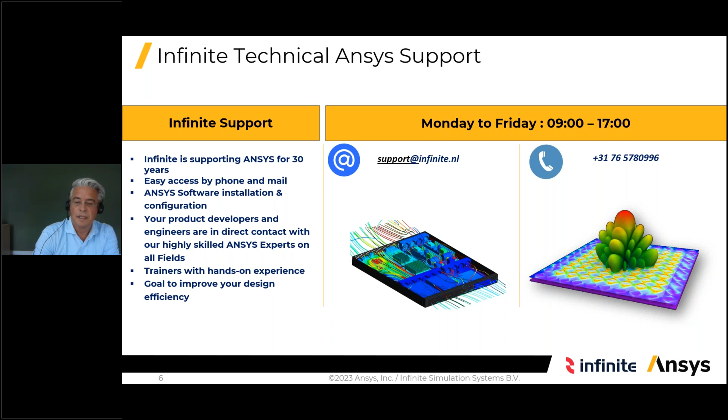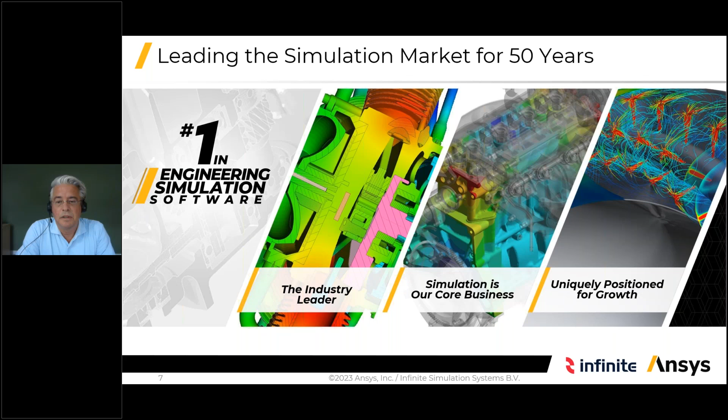ANSYS itself has been on the market for 50 years. They are the industry leader, so it's the most used simulation software out there. And the only thing ANSYS does is simulation. So they are focused on improving the software year after year, and that also makes it possible to have a great, unique positioning for growth and new technologies in the future.

Next, if you look at simulation in general, most of the time it starts with an idea and then an early design, and that's also where most of the costs are located. So using ANSYS upfront can help you to reduce the costs, by reducing the development time during your design and analysis, but also, of course, to avoid warranty costs. So that's the design and analysis part.

ANSYS is also getting more active in the manufacturing part, for instance reducing weight by doing topology optimizations, but also using ANSYS to simulate the 3D printing process, especially for metal. And finally, if your product or process is in place, you can also do simulations. The main reason is to reduce your maintenance costs, and that's what we call a digital twin nowadays.

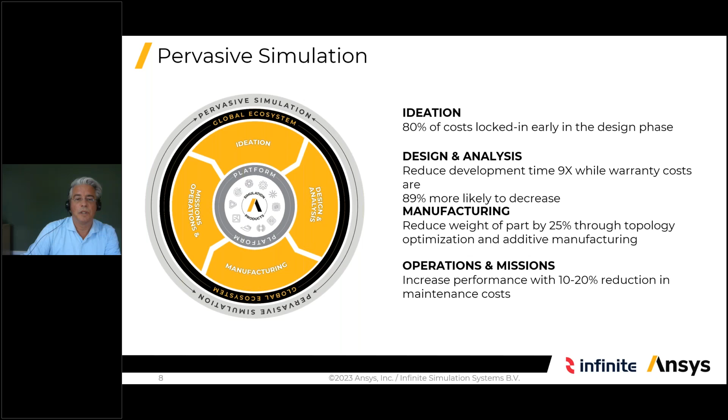Over here you see an example of such a digital twin. This is an example of ABB. They are developing, in this case, an electromotor, and the demands nowadays are getting more strict. You have a smaller volume, and you still have to have the same cooling.

So you want to optimize this, and in this case, the electromotor is calculated by Fluent to predict the thermal performance. Of this total model, a reduced order model is built, and that's done by doing a couple of hard designs, and then out of these hard designs creating a reduced order model so that you can have accurate answers in a matter of milliseconds even.

And so that's done by this technique. And in this example, you see an electromotor, and you want to investigate the thermal behavior when such a train starts, when it accelerates, when it's in the cruise phase, and when it stops. And then you can decide from the temperature distribution to predict the motor failure in real time. So the motor is sensored, and you compare it with your simulation results, and you can decide in a very short manner what to do when things have to be maintained or the train has to be stopped.

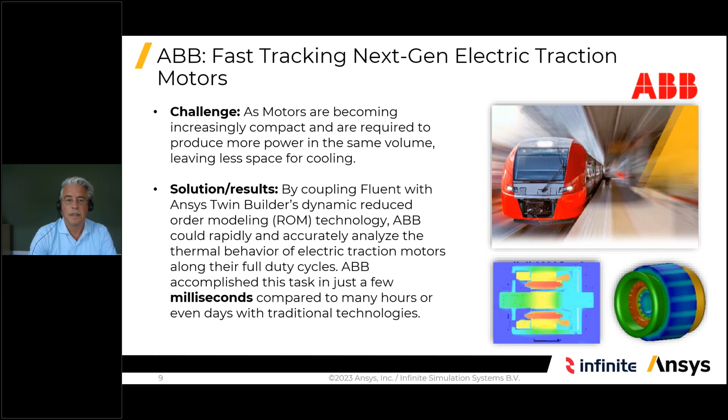If you look nowadays at the ANSYS portfolio, ANSYS started a bit like a structural mechanical software, but nowadays you have special solutions for material investigations, for safety analysis, for doing structural mechanics. Also, LS-DYNA is part of the ANSYS family, for explicit calculations, fluids with Fluent, the most used code. But today we are going to focus more on the electronics, and especially on the high frequency electronics.

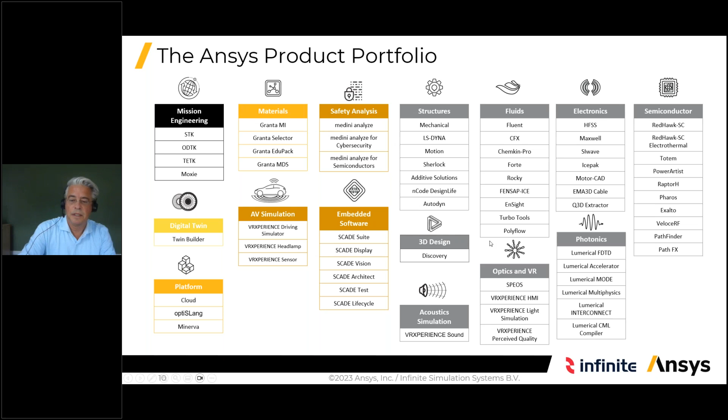If you look worldwide in the high-tech industry, probably where your company also is, we have a lot of customers. So 97% of the Fortune top 500 uses ANSYS. We also have a lot of customers served in the semiconductor market, the smartphone, the telecom market, and so on. A lot of startup companies who start with new technology, and we want to have a special program to make it possible for them to start with the software. And we are active in many countries.

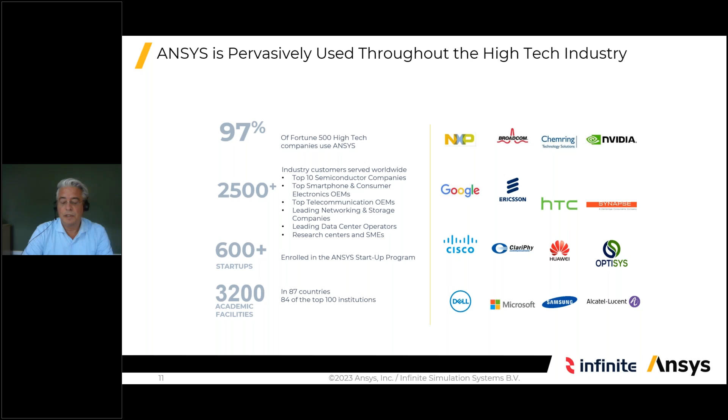You see some companies as an example, like NXP, and if we focus a bit down on the Benelux, customers using ANSYS and our electronic and high frequency solutions are, for instance, Nexperia, ASML, Thales, Thermo Fisher, Philips. So those are a couple, but there are many more.

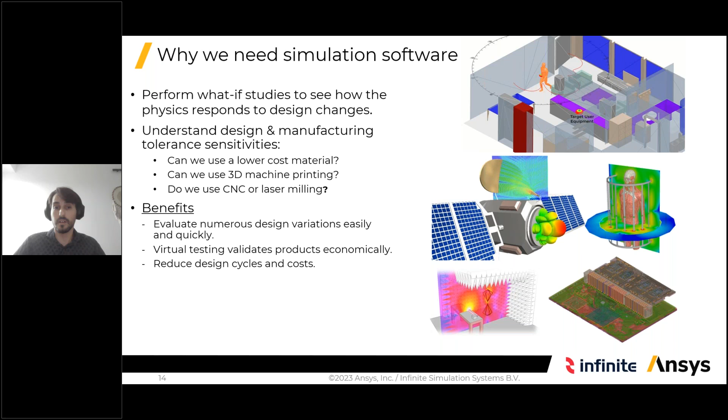Now, traditionally, companies have used a design cycle of design, building, testing, breaking, and fixing the problem. Of course, such an approach can be expensive and time-consuming. Design rules and best practices may not give engineers enough guidance to properly design modern, cutting-edge products. By using simulation, virtual model prototypes can be created and simulated, giving engineers more freedom to tweak their design, to see how their designs will change.

This helps engineers have a better insight into the design, but it can also give a higher degree of confidence that the physical tests run later on in the cycle will be successful.

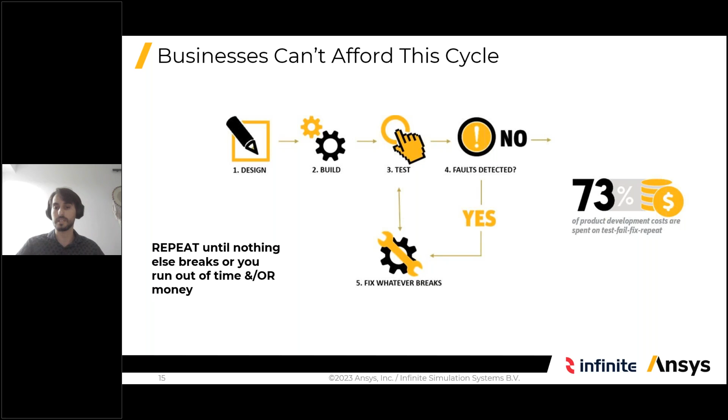We can accurately see and optimize reliability so we can have a more lifelong product. But of course, it's not only this. We are also supporting everybody, and we are partners along with our expert consulting. We can help you and guide you through your workflow for better efficiency and design for excellence.

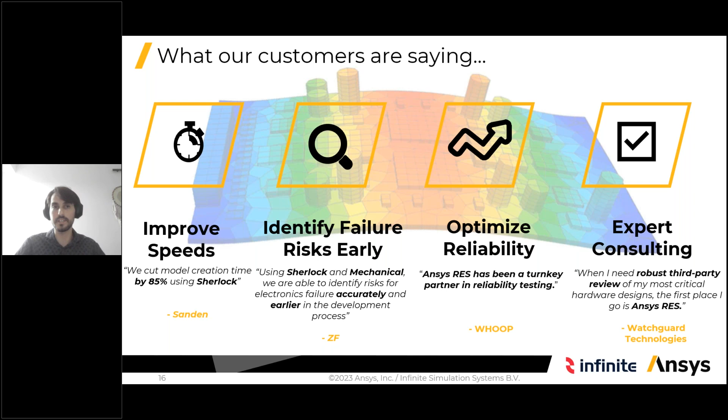Now, a wide range of customers have benefited from ANSYS electronic solutions. Benefits typically include reduced design and development phase, reduced material costs, also having fewer board redesigns and getting to the market sooner. We can have improved product performance and reliability. We have a number of assets such as case studies and white papers that show how others have benefited from ANSYS solutions.

Working with simulation tools early in the design phase, engineers can predict issues and work on solutions or changes quickly without the need for physical tests. Of course, they can design in such a way that our product is also shielded later on in the development phase from potential issues that might arise, which again would have detrimental cost at that time in the development phase.

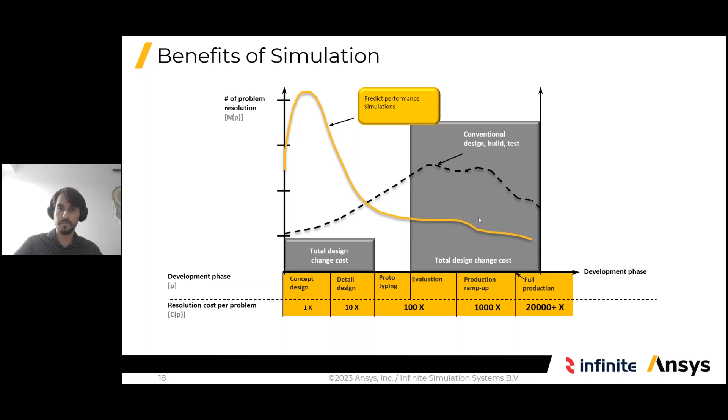And of course, this goes hand in hand with the market trends of today. We have seen consumption and cost of electricity rising over the past decades. Efficiency is an increasingly important aspect of any electrical design, whether that is a chip, an electric motor, an antenna, anything. Being able to push boundaries to have increasingly higher efficiency, smaller footprints, and better durability is key in today's world. But in order to push those boundaries, engineers must have tools to allow them to innovate.

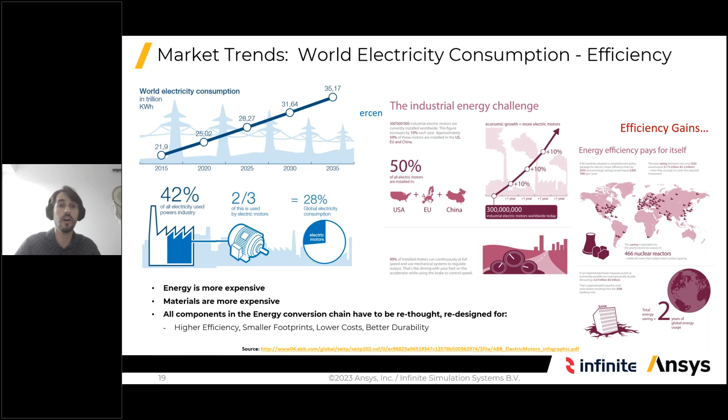Another trend of today is that more devices are being electrified. New challenges arise with this, such as durability, safety, and thermal management. We see that in order to tackle these problems and challenges, 75% of executives are increasing virtual prototyping.

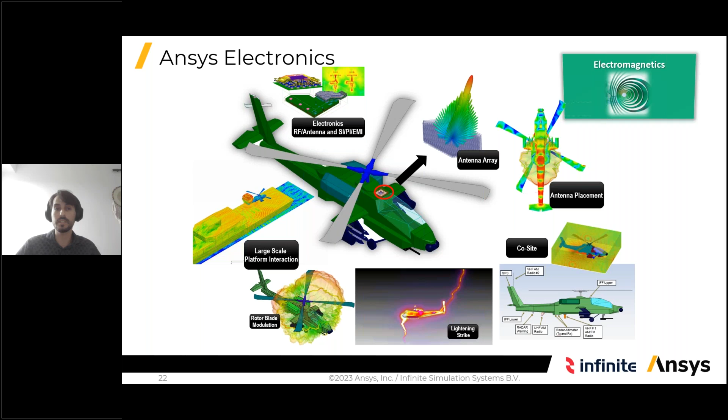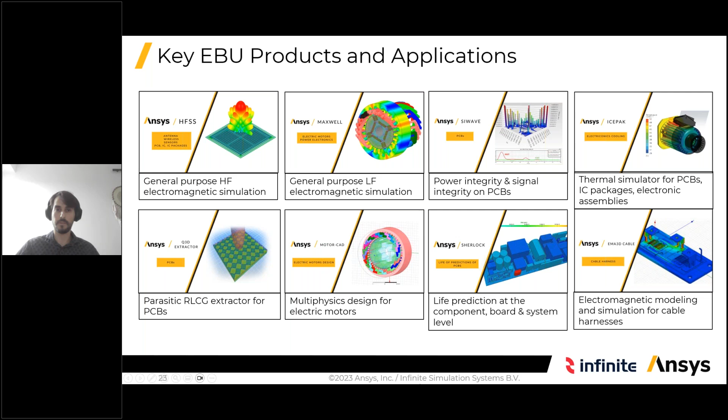Now, one of the core innovations in all electronic simulation tools that ANSYS has is the automatic adaptive meshing. The mesh of the design is automatically created according to design constraints such as geometry or materials used. But more importantly, it takes into account electromagnetic propagation phenomena, for example, hard turns and ports. In these difficult scenarios, the mesh will be denser. The mesh is essentially what is solved in the simulation, and that's why having an accurate and correct mesh can be the key to success. This technology is the golden standard of accuracy and what allows ANSYS to be the leader in simulation.

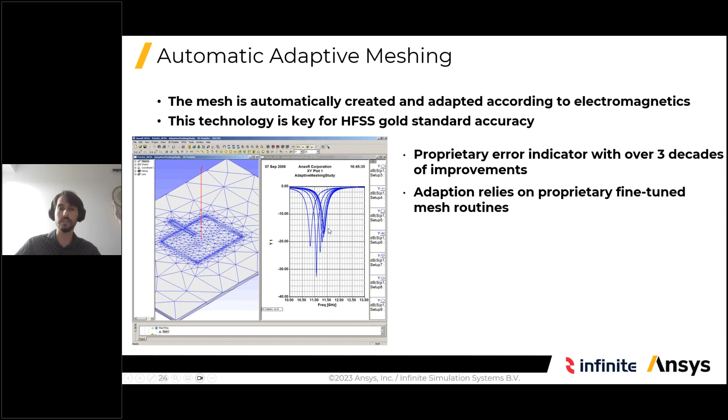Now, how does exactly this adaptive mesh framework work? Basically, it's an iterative process. The software is solving the mesh and it's seeing if the convergence criteria are satisfied. This convergence criteria can, of course, be set from the user, and it can be either very loose or very strict. The mesh gets denser with each pass until the convergence criteria are satisfied.

Of course, the denser the mesh gets, the more accurate results we will have, at the cost, though, of time and computational power. This convergence criteria can be fully customized, as I said. So an engineer looking to get a quick insight might choose looser criteria to get faster results. But if we want a very detailed analysis of the problem, we might choose stricter convergence criteria as to have

the best accuracy. The core idea of the technology is to provide the highest amount of accuracy with the least amount of computational power. So hence, we will have a minimal mesh. And as I said, all this is done automatically by the software. There is no need for user input except for the convergence criteria.

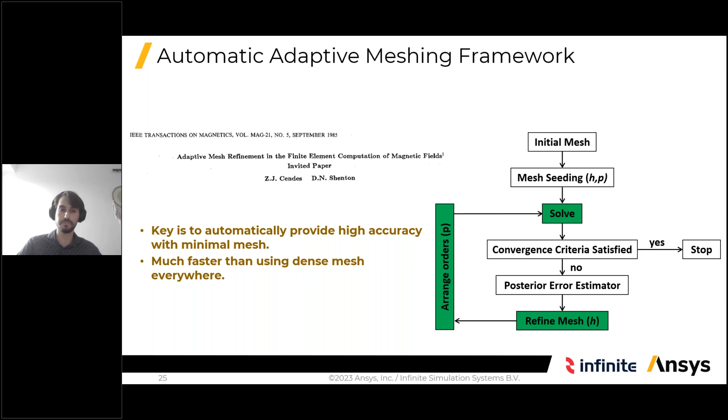Now, how are we different from other engineering software? As I said, the mesh is key for accurate results. Without a correct mesh, all results are in jeopardy. Having a user-based mesh creation, such as other tools are using, is a very time-consuming aspect that can also lead to discrepancies of results between users, because one user might have created a different mesh from another user and have different results.

This method of meshing can have a lot of challenges when it comes to small and curved geometry, which is usually key to solving electromagnetic problems. On the other hand, with the automatic adaptive mesh, the user does not need to spend, first of all, time to build the mesh, but second of all, also worry if his mesh is accurate or not. And he can be sure that the results he's getting are completely accurate with this automatic process.

Also, this automatic process can take into account more tricky geometries such as curves. And of course, you will not have any discrepancies between users.

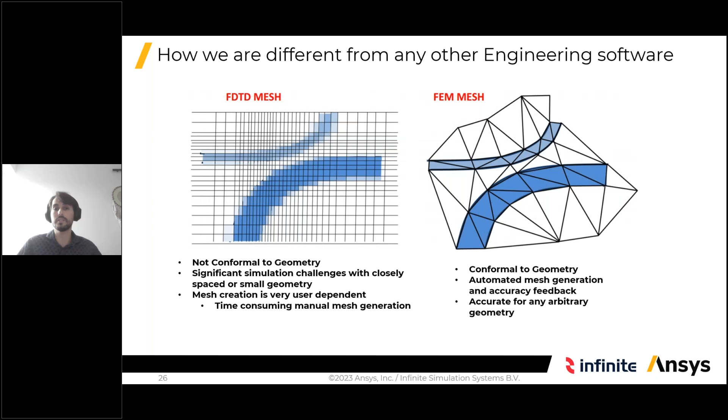Now, simulation can not only help with minimizing warranty costs or test and measurement costs, or even reducing the number of physical prototype builds. Most importantly, it can provide insight about the design to the engineer. Which are the critical aspects of the design? Which materials should be used in this design? How can the design accommodate for signal and power integrity and comply with EMI and EMC standards?

By using simulation, engineers also have extra insight which cannot be found via test and measurement, such as visualization of currents and fields, which is essential in electromagnetics to fully understand how devices operate. With digital prototyping, users now have the intuition to build better products by having the information and data they need quickly and easily available to them.

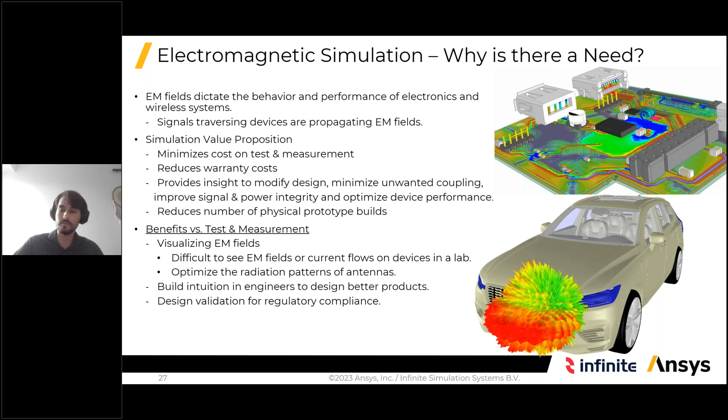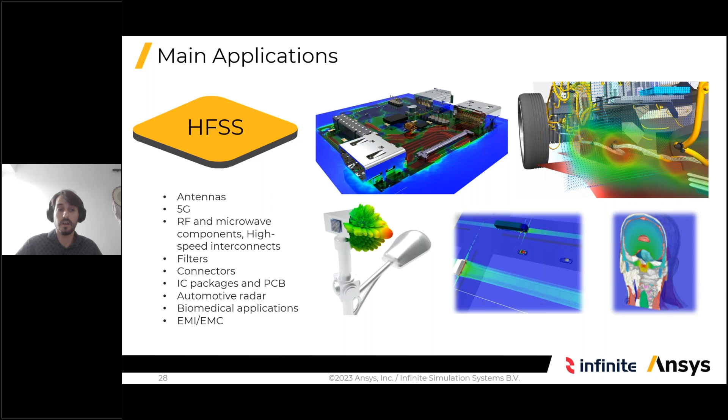Now, the main flagship product of high-frequency electromagnetic simulation of ANSYS is the ANSYS HFSS tool. ANSYS HFSS is a full 3D electromagnetic frequency domain solver. And with that, it can cover the most broad range of applications. This can be either filters, PCBs, RF components, antennas, even biomedical applications, and even automotive applications can be custom tailored with HFSS with great accuracy and insight.

As I said, it's a very diverse tool that is used for all sorts of electronics applications. Here you can see some examples of this, where it can be used for car autonomy, or antenna placement, or even biocompatibility. All these models are generated in HFSS, and the domains and the applications that HFSS can help with are tremendous.

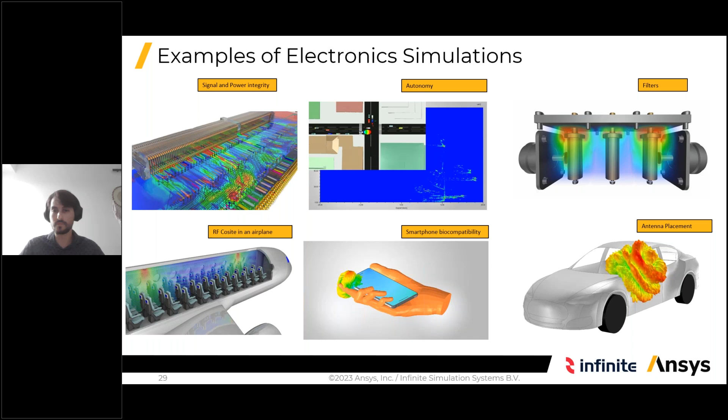Now, HFSS can solve the biggest and the smallest problems in electronics. And this is due to its diverse solvers, which all come with the software. Each solver is used for different problems. There is the finite elements solver for modeling high-frequency structures with high geometric and material complexity. This can be up to tens of wavelengths in electrical size.

There is also the fast method of moments integral equation solver, which can also expand the electrical size up to hundreds of wavelengths. We also have the shooting bouncing ray solver, which is the industry best-in-class technology for modeling installed antenna systems. We can go up to hundreds or even thousands of wavelengths in size with this.

And of course, with today's increased computational power, HFSS is able to tackle even the most complex and large structures such as aeroplanes or cities. I will talk a little bit about this domain decomposition method later on in my presentation.

So HFSS, as we see, is a high-frequency electromagnetic analysis tool, capable of modeling from sub-wavelength sizes through tens of thousands of wavelengths, all in one environment with one integrated workflow. So you can see how flexible it is. However, in today's world, PCBs are very important, and they are in almost all electronic devices. When it comes to PCBs, a full 3D solver such as HFSS could not be optimal.

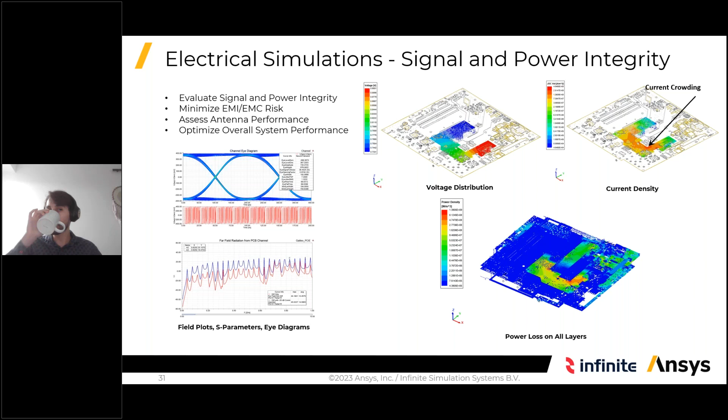SIwave can be used to see the voltage, current, and power distribution on the board and take into account signal and power integrity issues. It can also provide EMI, impedance, and crosstalk scanning across the PCB, but also act as a virtual compliance tool. It enables us to determine if the design will pass or will fail EMI or EMC standards, as well as communication protocol standards. By generating eye diagrams, we can be certain that our communication protocol standard can be passed.

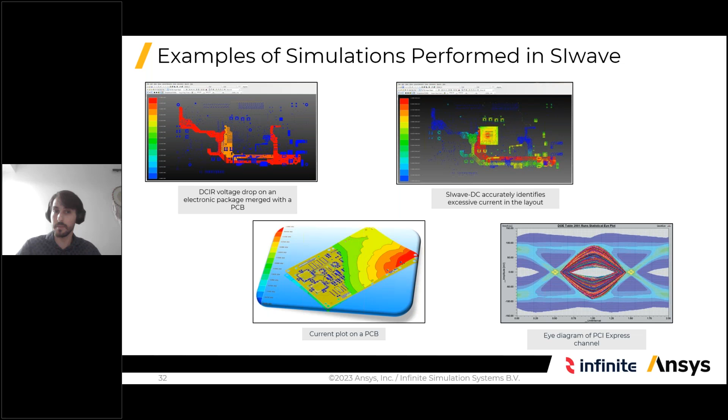We can also see excessive current layouts and take this into account for our further design and how to further improve this. The two tools, HFSS and SIwave, are also integrated with each other. We can perform design iteration and tweaks with the SIwave engine, and then use the HFSS solver to act as a validation frontend for a more detailed solve of the PCB.

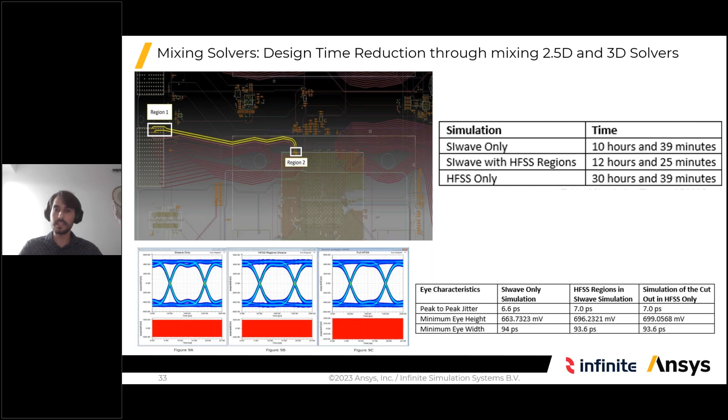Let's take now a look at an example of this system integration. In a PCB board, we want to minimize, of course, coupling and interference between channels. At the same time, we want to have signal immunity as well as reliable channel capacity. But of course, we also have to have the board pass EMI and EMC compliance tests. All of these are very complicated issues.

By using SIwave, we can very quickly and accurately predict the electromagnetic interference margins and see the crosstalk between the channels. We can also very easily scan the PCB for certain design violations or eye diagrams to see if our communication protocol compliance will pass. Then we can take these results generated in SIwave and feed them to our 3D solver, HFSS. We can then have a full 3D wave simulation of the complete system in order to ensure, for example, the EMC certification test can be passed.

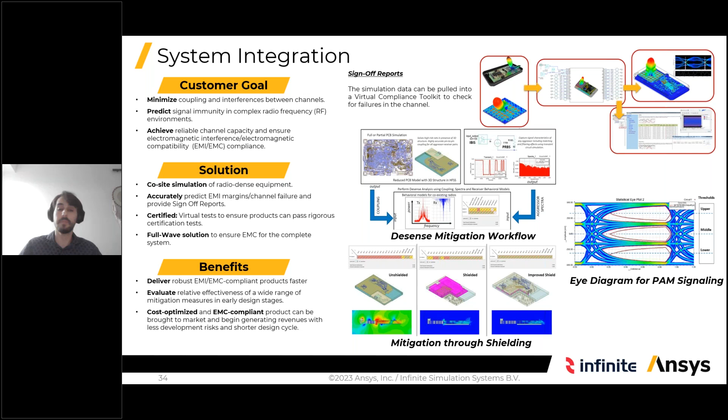Now, give me a second, I will drink some water.

Another major concern for engineers is design for reliability. Engineers nowadays have to take into account thermal aspects and mechanical aspects in their design, first of all to prolong the product lifetime, but also to be certain that there won't be failures due to these mechanical or thermal constraints.

Now, chip, package, board, and even system-level thermal simulation is needed in today's market. We all know that devices operate better when they are within their thermal limits. And when these limits are exceeded, not only is performance degraded, but there is also a high probability of failure, which can be detrimental for our company.

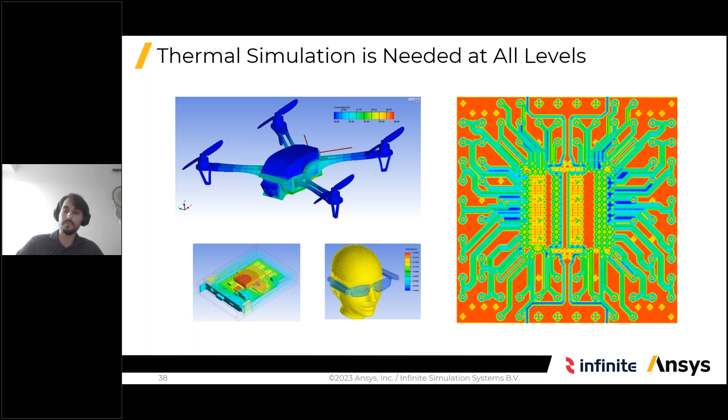By identifying areas of heat generation in the initial design of the device, we can ensure good operation and safety. Thermal issues are usually accounted for quite late in the traditional design process, but can be very, very costly if they appear. Taking into account heating issues from the beginning can save us on both costs and time later on. This way, we can avoid the burn traces that we have seen in many, many PCBs, or even starvation of flow due to poor cooling in boards.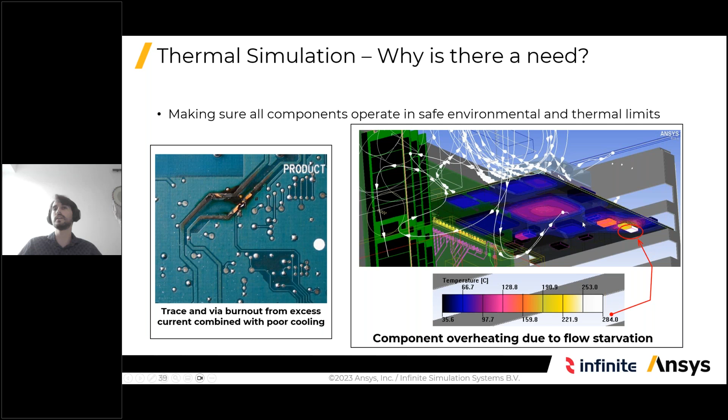IcePak is a thermal simulation tool which can tackle these very serious issues early on. It has a computational fluid dynamics, or CFD, solver. IcePak can help accurately model any environment and domain, from the chip to the IC package to the supercomputer server room. IcePak can analyze this and generate the heat maps that will be needed in order to better understand the design.

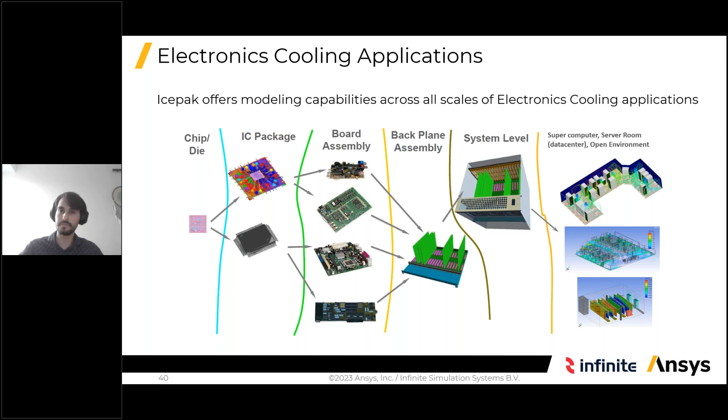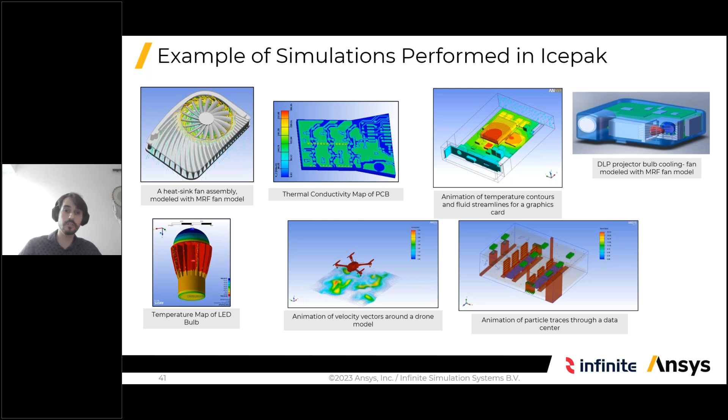IcePak has coupling towards the finite element method tools, the electromagnetic tools, the CFD tools, and eventually passes results to the system level connections for system response. There is a comprehensive multi-physics analysis between all of these tools that works seamlessly.

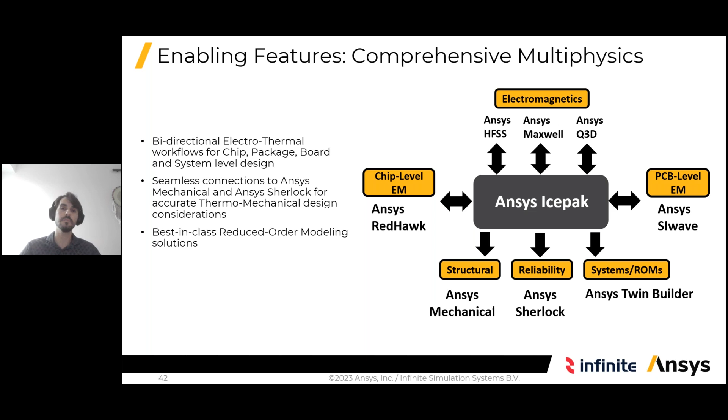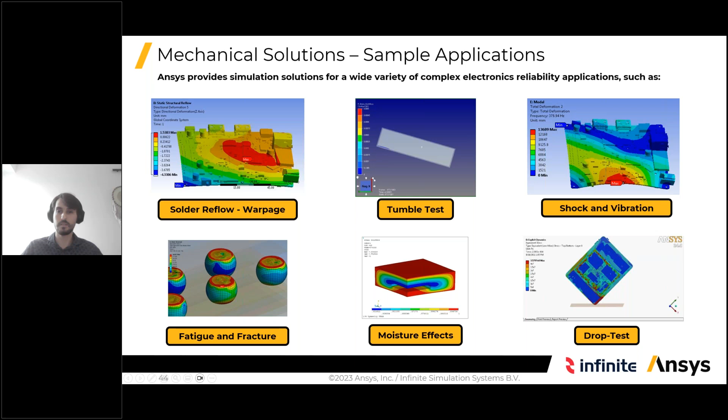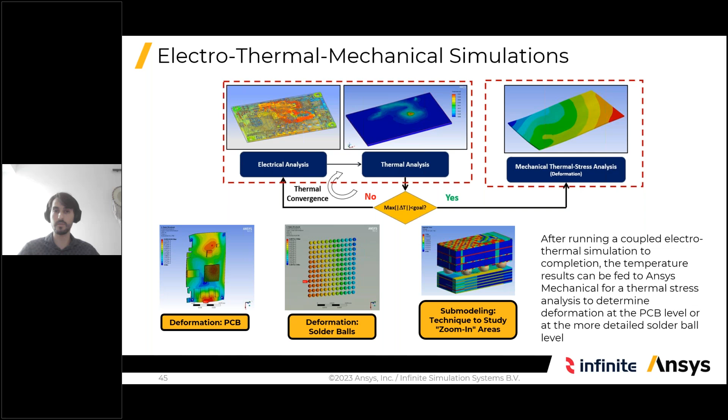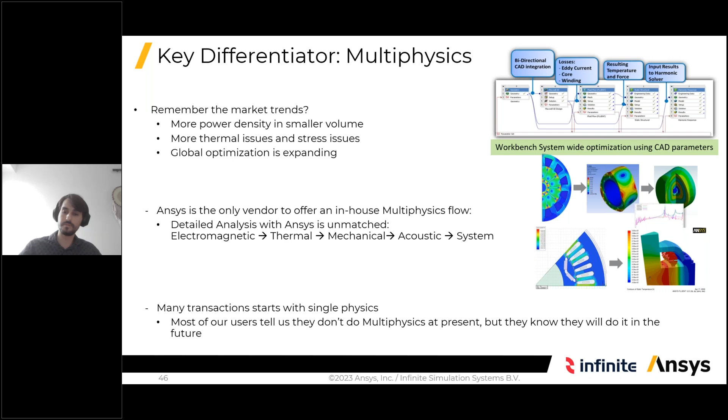Now, let's see a reliability example of a smartphone. As we know, in smartphones, we tend to increase electronic density as much as possible to fit more components in a small area. This packed density, of course, can lead not only to electromagnetic interference issues, but also overheating or mechanical stress issues if not designed properly. At the same time, electronics lifetime as well as prediction of failure has to be taken into account before designing the smartphone. With accurate 3D multiphysics modeling, we can safely predict all of this prior to any physical test.

Simulating in this multiphysics fashion can help with the predictability of all the smartphone components. This helps extend not only the lifetime cycles, but also helps engineers to think outside of the box and add capabilities into the future, into the next design.

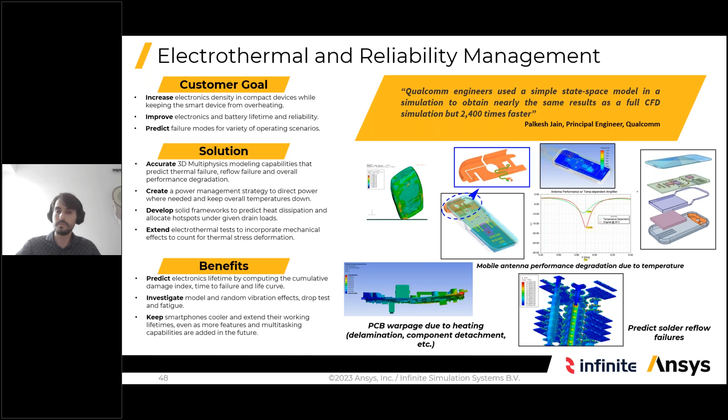Now let's take a step further, and we can also add reliability physics analysis to extract the lifetime of a PCB. Sherlock is a tool that does that. It's a dedicated finite element analysis tool that can analyze the various vibration fatigues, thermal cycling fatigues, or even solder reflow failures throughout time.

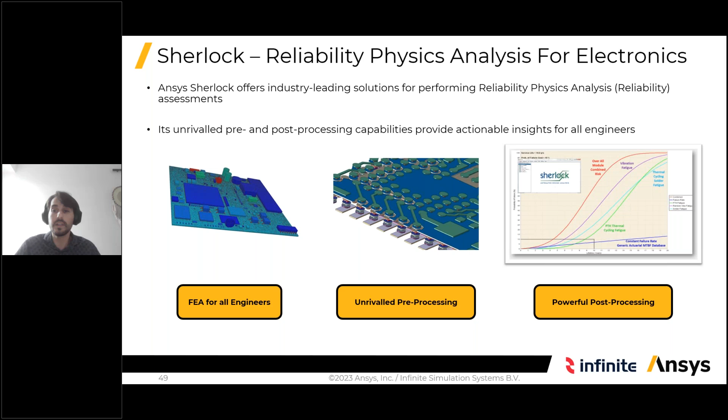So implementing this reliability assessment early on can be very beneficial. Sherlock can help in the initial part selection: which part will have a better life cycle time, or which part on the PCB board might degrade faster over time. Of course, part placement also plays a big role in the lifetime of a PCB. By assessing different topologies via Sherlock, you can find the best position for the parts. Some components might be stressed due to physical vibrations over time, so a different placement can help overcome such issues.

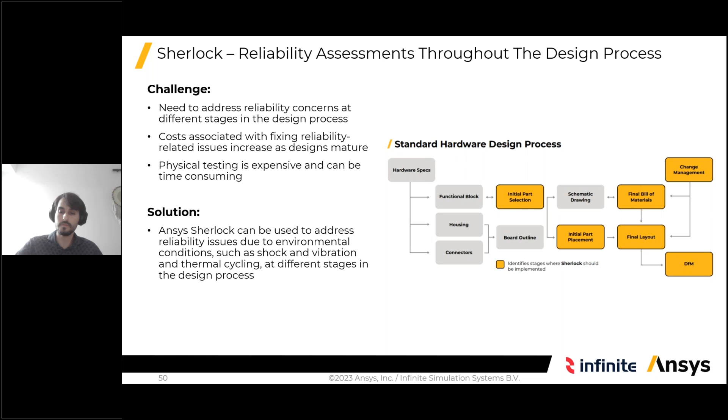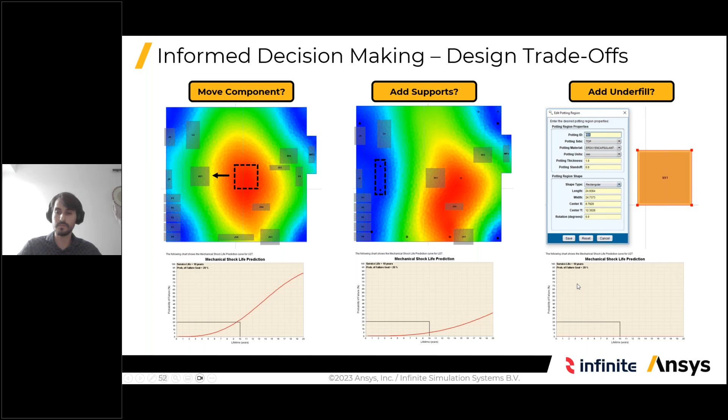Now to summarize, with different ANSYS tools combined in a comprehensive multiphysics solution, we can greatly predict all possible outcomes of a design. We can simulate all possible scenarios and predict each aspect of the design, whether that is electrical, thermal, mechanical, or life cycle predictions. The ANSYS portfolio offers solutions for everything in a complete package.

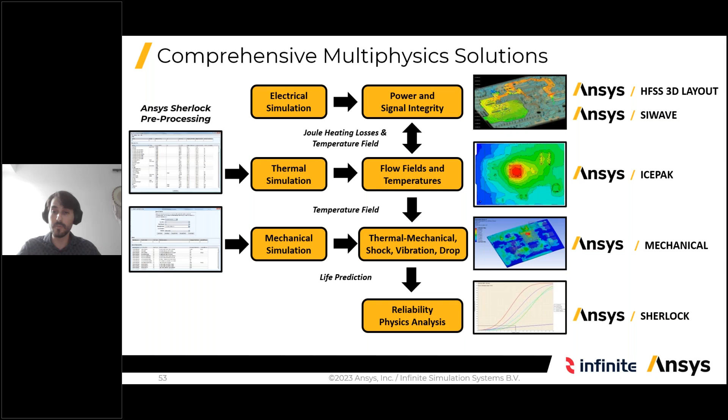All of these intricate simulation solutions can help engineers tremendously. By using it early in the design process, it can help them better understand the nature of the design and its flaws, safely predict any issues that might arise in the development phase, and take into account every little detail. It can help them innovate and be ahead of competition.

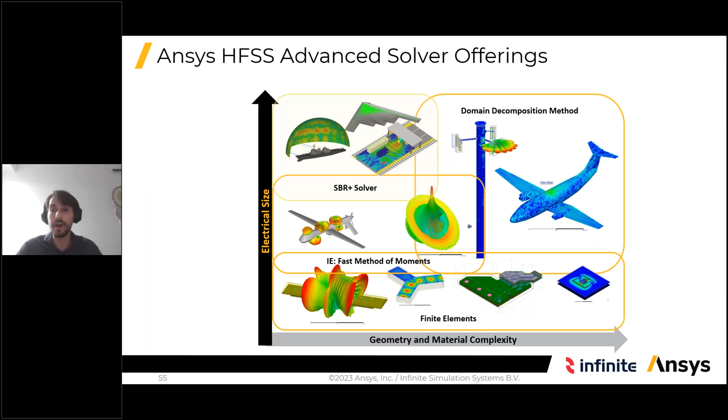And simulation, as I said, today can tackle all possible geometries and sizes with the help of the ever-increasing computational power at our disposal. What was a time-consuming problem in the past nowadays can be solved in seconds. Simulation has developed and scaled over the years in both complexity and size, and is becoming a necessity in today's complicated world. With the help of high-performance computing, or HPC, we are able to achieve faster and faster results and tackle even the most complicated and massive designs.

30 years ago, a simple coax to waveguide transition might take hours to solve. Today, this is done in seconds, and we have computational power to thank for this. But ANSYS is also always trying to innovate in that domain. For example, as I talked about earlier, the HFSS domain decomposition method takes advantage of these developments in computational power.

Nowadays, we have multiple CPU cores in our PCs. So what this method does is it slices the whole design into smaller parts, and the smaller parts are analyzed with different cores from the multiple cores that we have on our PC. This produces a result much faster than one single big simulation. Of course, these results always follow the golden standard of ANSYS accuracy.

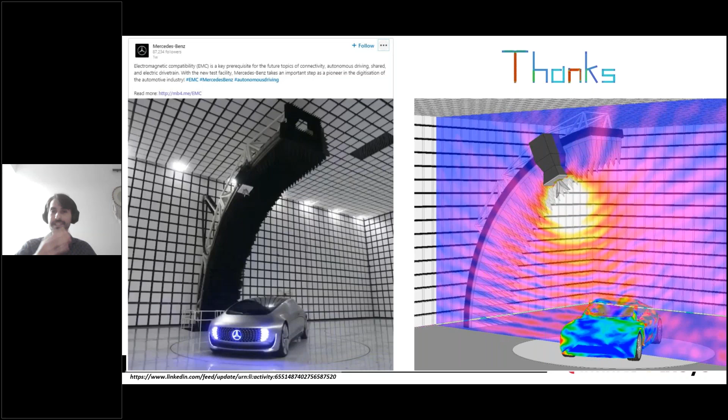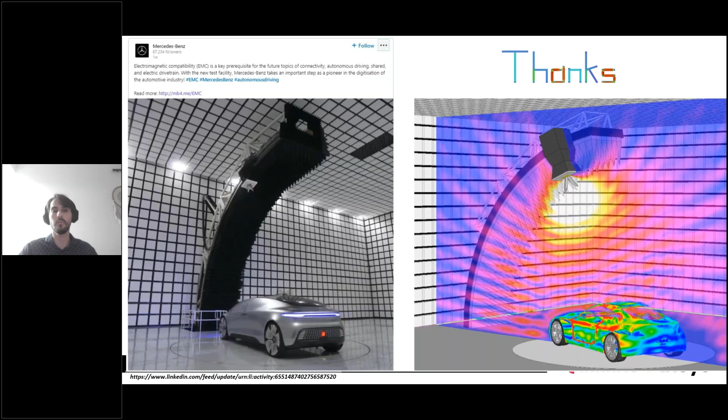And now I would like to finish up with a very nice example from a partner that strives for the digitization of the automotive industry. As you can see here, we have a digital model for a full EMC testing facility done by Mercedes-Benz. You can see that simulation today, what simulation can achieve and how it can help you, is becoming a more and more necessary tool.